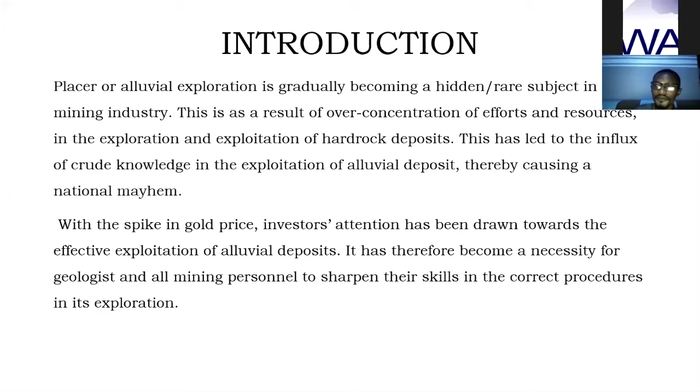We first look at alluvial deposit formation, how alluvial deposits are formed. In school, we all learned how deposits are formed. We learned of hydrothermal deposits, skarn deposits. But unlike other deposits, alluvial deposits are not primary, like they came from lava or something of that sort. Alluvial deposits are secondary. It means a first step must be done before a second one happens. So alluvial deposits are always a derived deposit.

So they are gotten from either an igneous or metamorphic deposit, which has been weathered to form the alluvial deposits. And it is formed by the weathering of enriched veins, which eventually accumulates the mineral of interest. The vein itself might not be potentially exploitable.

When you come to the eastern corridor of Ghana, there is only one hard rock mining company here, which is Newmont Akyem. But there are numerous alluvial deposits here. And you ask yourself, why is there only one hard rock mining company and many alluvial deposits here? It is because the vein that the alluvial deposit was formed from might not be exploitable. That is, the width or thickness might be so small that hard rock mining cannot be done on it.

And so with continuous washing, eroding and weathering of this small vein, it accumulates by the action of water and other bodies, and then it further becomes mineable for alluvial mining companies. Through countless ages, the surrounding country rock and vein itself weathered, broke down and eroded away by rain, frost, and chemical reactions. The gold, being chemically resistant and heavy, was left behind in the process.

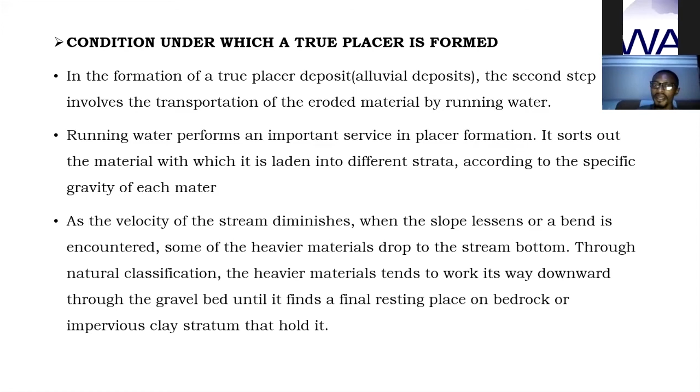Consequently, the bottom gravels are enriched with metallic particles, the coarse and heavier gold particles seeking the bedrock, while the lighter ones are found higher up. So when you encounter a gravel which is enriched, you can see that the nuggets are found on the base, that is closer to the bedrock, with the powdered ones on top.

However, the gold usually ends on the bedrock and doesn't go deeper, because the bedrock is the parent rock, the foundation on which the gravel was laid thousands of years ago. And so the gold particles will not go within or below the bedrock. That is for alluvial deposits. But sometimes the gold itself will be found a little bit within the bedrock, which becomes clay. And so it is sometimes better to add the bedrock in your exploration activities.

One thing you have to know is that it doesn't always follow that rich placer deposits are found in close proximity to a vein. When you find a rich placer deposit, it doesn't mean that there is a rich vein near. That is not always the case. Indeed, the conditions favorable for the concentration of the gold may be found many kilometers from where the precious metal was first torn out from the vein walls, none of which may be economical to work on by itself.

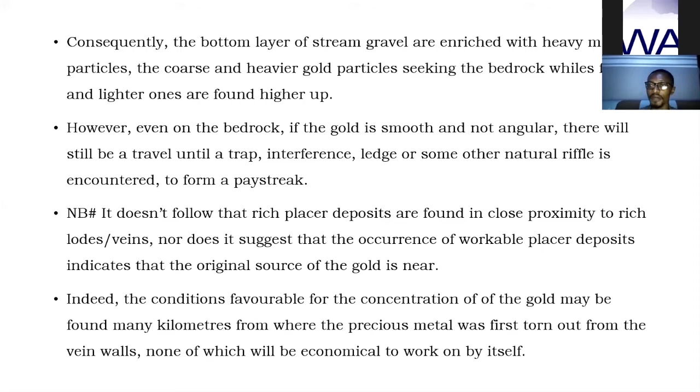As I said, when you come to the Eastern Corridor of Ghana, Newmont Akyem is here, but there are numerous alluvial mining companies and galamsey people around. They search for the smaller veins that the hard rock people cannot mine, and they treat it as galamsey people. And so these smaller veins have been worn down and accumulated together to form alluvial deposits, which are mined by other alluvial mining companies. However, you can look at a gold particle and confirm whether the source of the gold is near or far.

When you process your sample and get the gold out of it, and use a microscope to look at it, sometimes you can see it's very smooth or rounded. It means it has traveled very far. But sometimes it's jagged and angular. It means the source of the gold is not that far. So that is one of the indications that can help you. Maybe you want to trace hard rock deposits; that is one of the indications you can use to trace an area where there's a possibility of hard rock deposits.

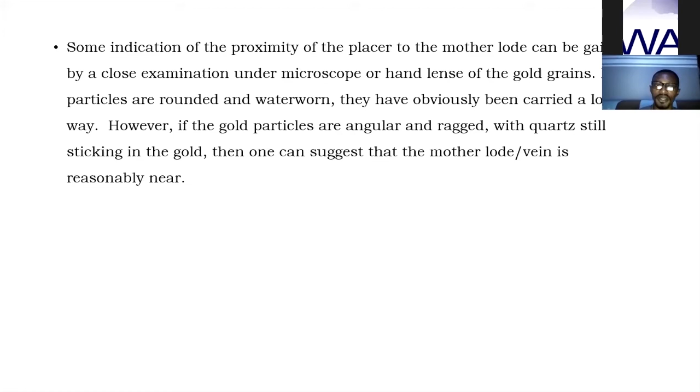However, there are similar deposits to the alluvial deposits. We have the eluvial deposits. These are deposits derived by in situ weathering or slight gravitational movement and accumulation. And we have the colluvium. This is a general name for loose, unconsolidated sediments that have been deposited at the base of a hill slope by either rainwash, sheet wash, slow continuous downslope creep, or a variable combination of these processes.

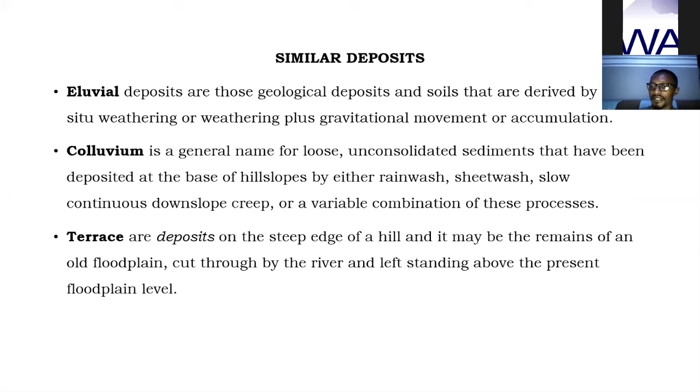When it moves down to the base of the mountain, we call it colluvium. When it comes to the river, which is the main transport medium, it becomes the placer. And when it moves and deposits on the steep sides of a mountain, it forms the terrace deposits. So one will ask, what's the difference between terrace deposits and colluvium deposits, knowing that they all lie at the base of a mountain? When you look at the gravel of a colluvium deposit, because it hasn't traveled far, it's from this same mountain that it got deposited here.

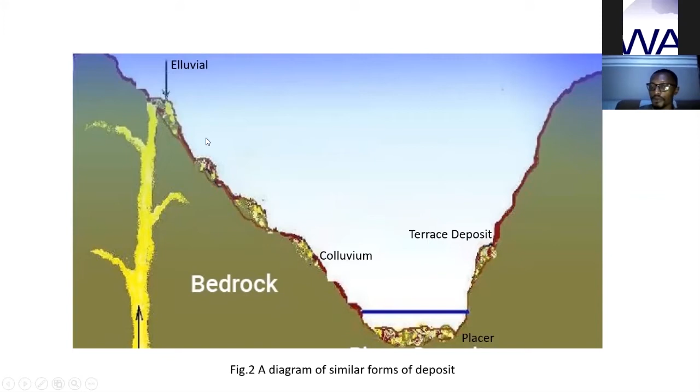The rock constituents are similar to the environment in which they are deposited. But because this material traveled from somewhere and was deposited on the hillside of a mountain encountered in the transport direction of the river, these gravel or rock components will not be similar to the environment in which they are found. That is the difference between terrace deposits, colluvium, alluvial deposits, and placer.

In the alluvial mining environment, alluvial mining has largely been left to the Galamsey people. When you mention alluvial, the word that comes to everyone's mind is Galamsey. In Ghana, Galamsey has caused a national crisis, and efforts aimed at mitigating its effects have proven futile. Our water bodies, virgin forests, sacred groves, and tourist sites have all been adversely affected by the evil hands of unprofessional placer mining.

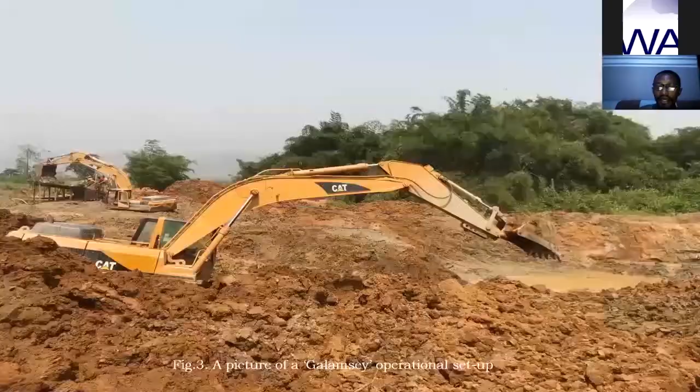This is a Galamsey site. You can see how they are destroying the land. It's difficult to reclaim this. This is the Galamsey site.

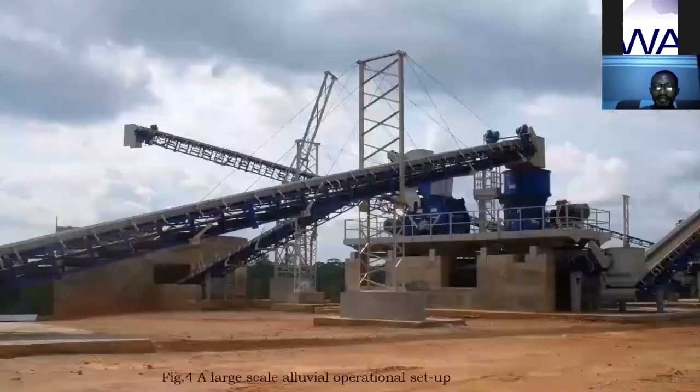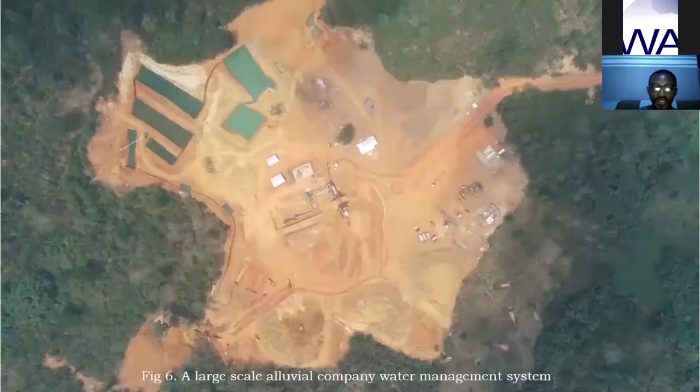I took this drone shot, and when you look at it, they use a serpentine movement to do the recycling and washing. After they create a dam, very big ones, they pump water from nearby water bodies into it. Once they start washing, they will not pump water from any stream again, nor will any water move from the operation site to the river bodies.

This is the plant, and the dirty water will move to this one. It settles down through this channel, gets to this one, settles again into this one, settles again into this one. This one gives water back to this, just like a snake, which is why we call it a serpentine. And then this, and then this. When it gets here, it will be clean enough to wash again with. So they put pumps there, which pump the water to the plant to be used for washing.

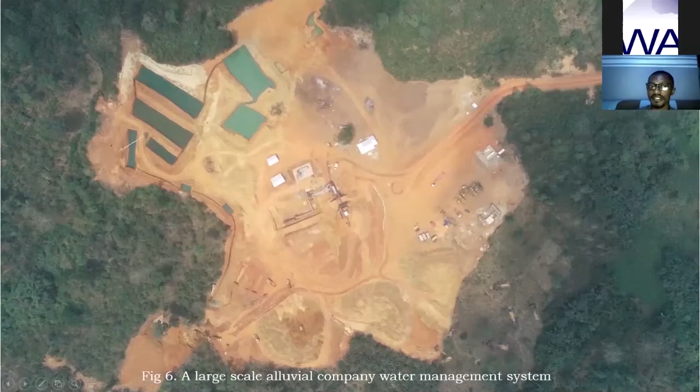We have some superstitions surrounding alluvial deposit prospecting. They believe that gold is a spirit and has an affinity for blood. It will shock you that when you go to the bush with people following you, and maybe you are working and someone gets hurt, some of them become happy because they believe that since blood has come out, the gold or the sample will be of high grade.

This can be seen in Galamsey sites where, before they start mining, they kill a sheep or goat, and sometimes bury a cow, because they believe that gold is a spirit and must be appeased with blood before you can get a high grade. They also believe that wherever a rainbow ends, there is a high possibility of the presence of a paystreak. A paystreak is an ore within an ore which is very, very profitable. Even in our childhood, I think we heard that wherever a rainbow ends, there's a high possibility of the presence of a paystreak.

To me, I've seen this enough, so I tried to prove it. We saw a rainbow and tried to follow where it ended. We went there and did a pitting. We got nothing — indeed, it was a low grade. We got nothing, so this has been proven false, or at least for my side, it has been proven false.

Gold being a spirit, they also believe it can willingly appear and disappear. They think that when you do your prospecting and get a grade, because it's a spirit, if you don't appease it, you will come back there again and the grade will not be as you predicted.

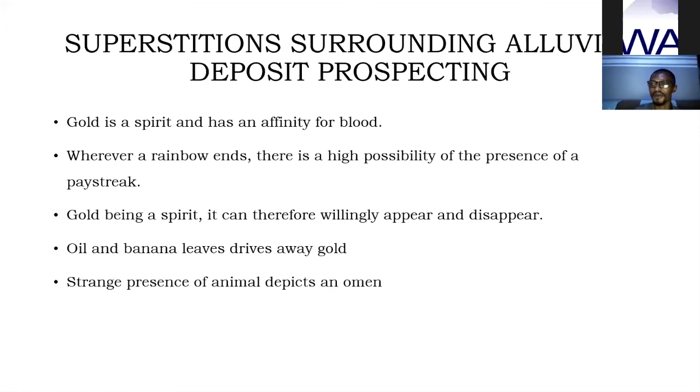When you want to start prospecting, the equipment needed includes a GPS device, measuring tape, spray marker, pump machines, sieve analysis tools, pans, a 2 decimal place scale, a kilogram scale, and perhaps a prospector machine, one of the very essential components of prospecting.

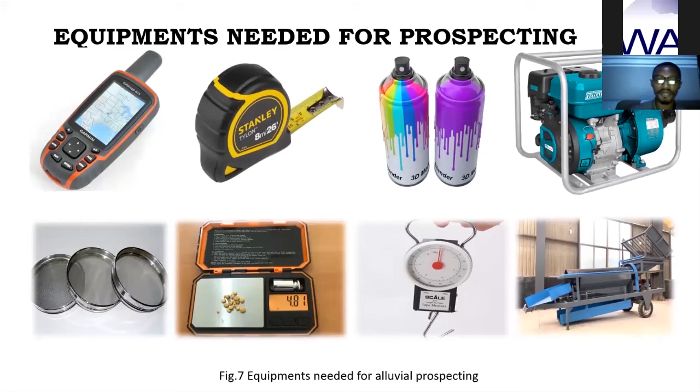I have a budget here that I sent to someone. It includes cutlasses, GPS batteries, flagging tapes, permanent marker pens, a 50-meter measuring tape, pick axes, shovels, digging axes, iron bar, bucket, rope, head pans, rubber bowls, sample bags, 0.1 cubic meter drums, hand gloves, pumping machines, extracting blanket, shunk or topper sieve, basin, panning or wooden bowl which they call Kudowa, gold pans, a field notebook for your own use, A4 sheets, flat file, stapling machine, stapling pins, Wellington boots, helmet, and field bags, which will cost a total of around 4,000 cedis.

Then a prospector machine currently costs around 2,000 Ghana cedis. So with 6,000 cedis, you can start your own business if you're a geologist and unemployed. When you have a contract and submit this budget to them, they have to supply you all these materials or logistics for you to go into the field to do your prospecting.

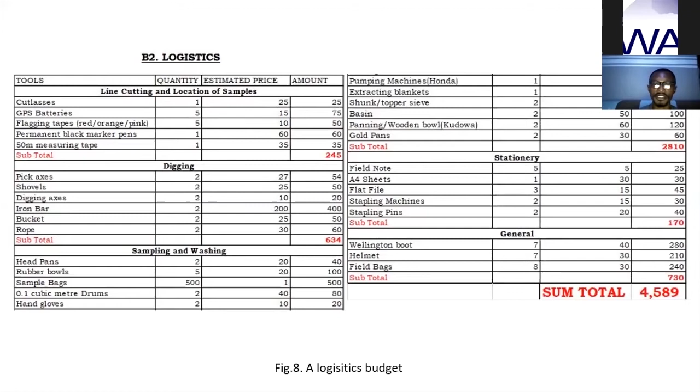Before you go to the field, there are background activities you have to do. First, ensure there is a cordial agreement with opinion leaders and investors before you set out. Negligence of this point has led to the death of many geologists, as well as injury of many personnel and other geologists. So ensure there is an agreement, even a written agreement, between you, the investor sending you into the field, and the opinion leaders.

You have to do background checks. Ensure the area to be prospected is an auriferous zone, you don't want to waste money digging pits when there's actually no gold in the area. So the first thing to do is find a major stream, go to a bank where the river is not too deep, take a sample, and wash it. If you get even a small speck of gold in it, there's a high probability that there's gold in the area.

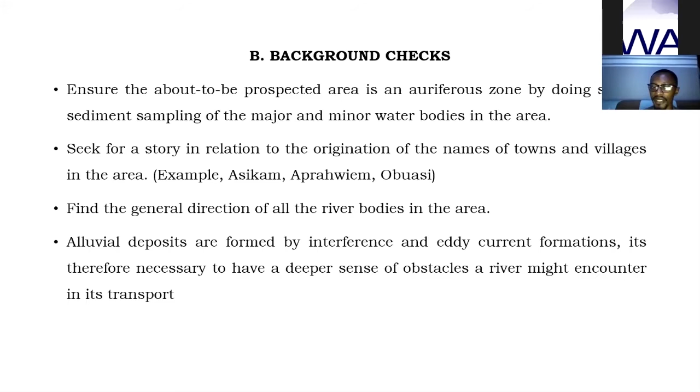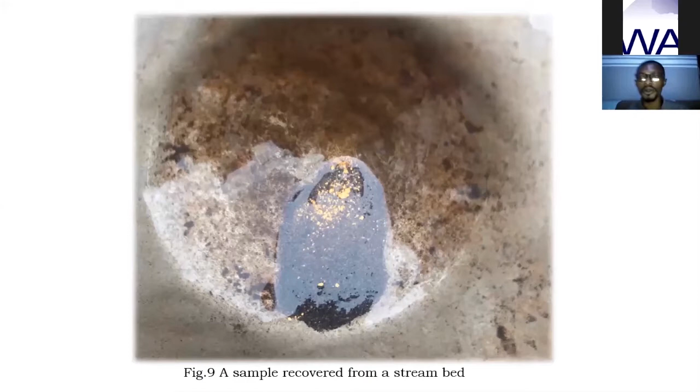Before you go into prospecting, you know budget is scanty. So as a geologist, if they ask you, can you just put in one point, just one point to show us whether the place is good or not? That is finding paystreak zones. You should be able to do that because it is your expertise. So when they tell you they need only one point for you to put there, you should be able to put a point to show whether the place is good to be exploited or explored.

The first thing you have to do is find ancient working pits. Our grandfathers were not stupid enough to work on places which are not rich. So when you see places like this where they have dug into the ground to search for a mineral of interest, it means the place is rich. You should also put a point there to see what they were looking after.

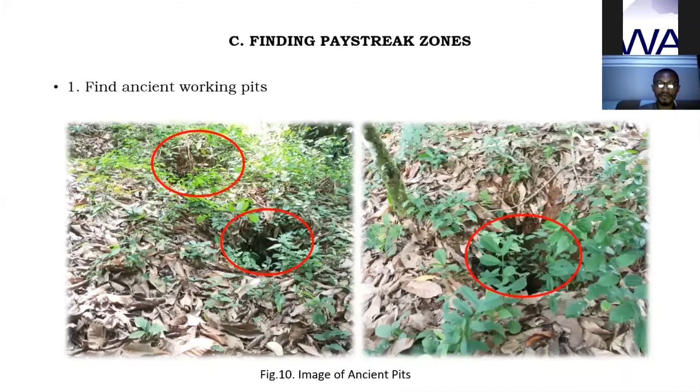The first thing you have to do in the field is create a model, not just go and be putting points there. You have to do a three-dimensional model to know whether the area is good or not by looking at the paleo environment. When I say look at the paleo environment, it tells you that any valley you are seeing now, in the olden days or in the paleo environment, in time past, was bigger, and any mountain you are seeing now was higher. Any valley you are seeing now was thicker or wider, and any mountain you are seeing now was higher.

If given the second chance, I will try to teach how to create a three-dimensional model using Surfer, if I'm given the next chance.

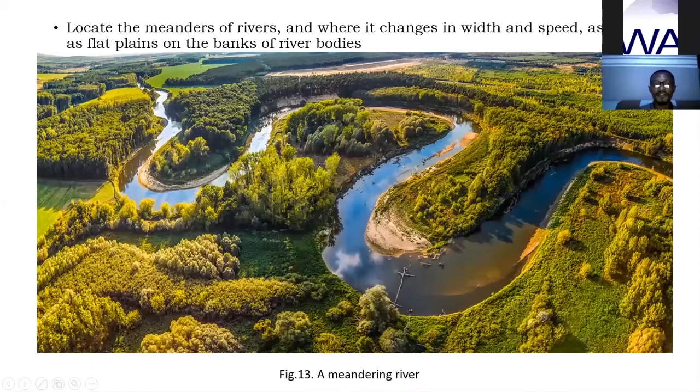And when you see a flat plain just beside a river body, that place you should prospect, because it served as a flood plain. So any load of gravel the river was coming with, it deposits it on the flat plain. Also, when you see a river which has been interfered with by a mountain base, you should also search the mountain base, because in time past the mountain was obstructing the river. And so the deposits will be formed at the base of that mountain where it was obstructing.

Also, search for marshy areas. Areas that are marshy, when it has not flooded, you can search that place, because in time past it served as a bowl where it collected all the sediment being carried by water. So you can search for marshy areas as well.

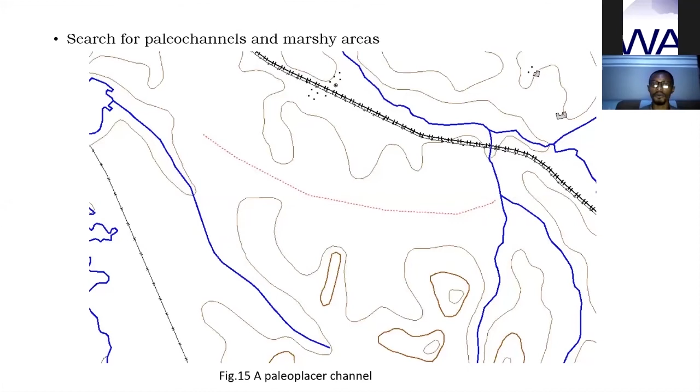And now, knowing how to put paystreak points or where there are high-grade zones, sometimes that alone cannot help you to do a geostatistical analysis. So you have to plan your points on the area that someone has contracted you to search. And we have different means of planning points. We have the baseline and cross-line method, which is usually used by some companies. We have the square, rectangular or kite pattern. We have the grid system, the staggered pattern, the radial pattern, and the random pattern.

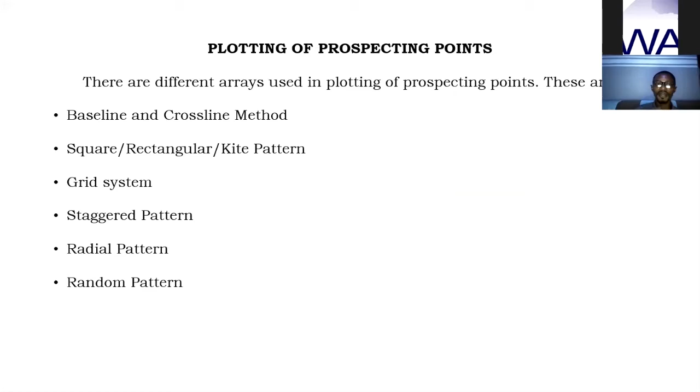The baseline cross-line is a pattern that follows the general direction of the major river of the area. Baseline is the line that follows the direction of the river and seeks to know the grade difference of ore along the river body, whereas cross-line is perpendicular to the baseline and seeks to know the dispersion of grade from the river body. One advantage is it's an effective method to find the trend and extent of an ore body. One disadvantage is an ore body unrelated to the major river may be interpreted as a branch ore body because of the connection between the baseline and the cross-line.

An ore body which is not related to the current river channel may be interpreted as if it is part of the river channel that we see now. And plotting of points becomes confusing in places where there is no distinct general direction of rivers or streams. When the rivers are not flowing in one direction, it becomes difficult to put in a baseline. And so this is the baseline cross-line method. You can see the baseline, which is the green line, following this river.

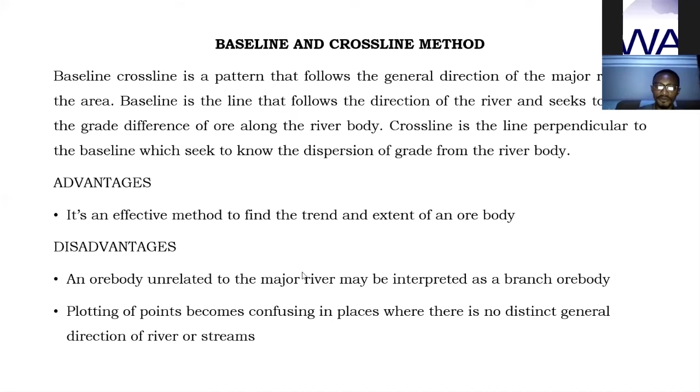So the general direction of the river is northeast, southwest, like this. Have the cross line as the orange; wherever the baseline and the cross line sit, you put a point there.

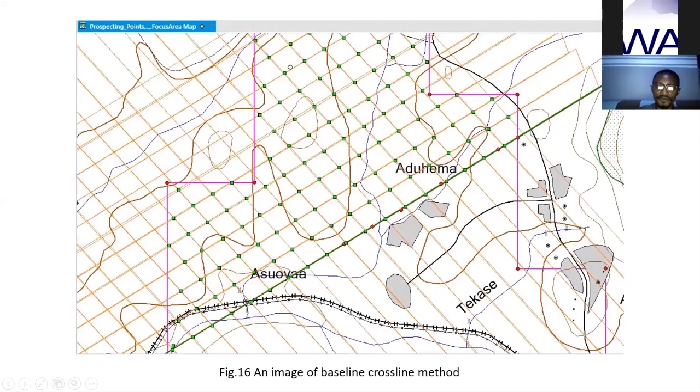We have the square, rectangular, and the kite pattern. The square pattern is used in areas where there is a symmetric dispersion of grade. That is, when you pick a point or you move in that direction, the dispersion seems to be homogeneous. Whereas the rectangular pattern is used in areas where the grade homogeneity is continuous in one direction but converse in the other.

And the kite pattern is used to confirm a pattern, either square or rectangular; you can use the kite pattern to confirm it, together with the square and rectangular pattern. The advantages are its resemblance to the baseline cross-line method. It can predict grade distribution in proximity to the river, as well as the grade distribution of gravel that are not in proximity to the river body. And if accurately spaced, it can predict eluvial, colluvium, and alluvial deposits.

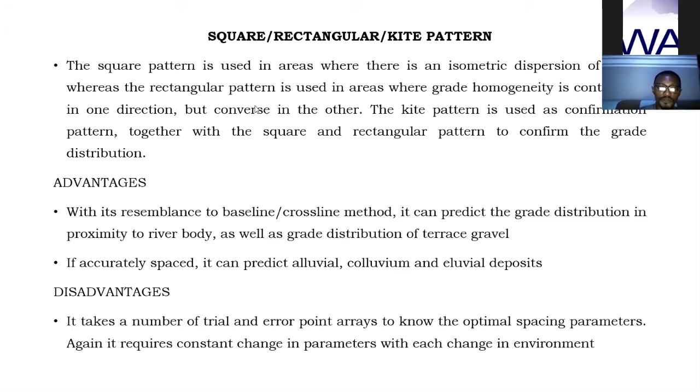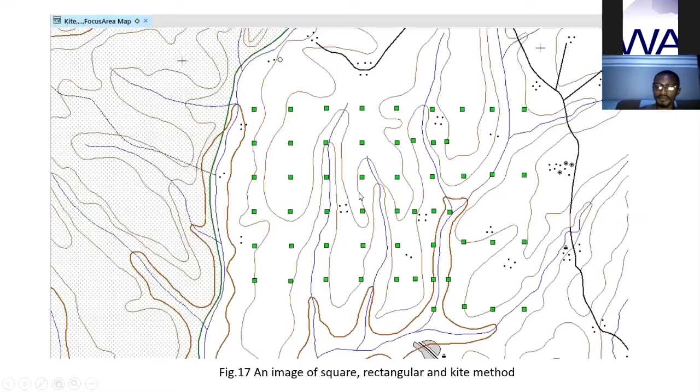And then we have the grid pattern. The grid pattern utilizes the latitude and longitude of an area as a means of plotting points based on predefined spacing criteria. Wherever the longitude and latitude is, one puts a point there. So let me say you are using ArcGIS Pro or MapInfo Pro. You locate your area and you grid longitude and latitude on it based on a spacing of, let's say, 100 meters by 100 meters. So wherever the 100 meter latitude meets the 100 meter longitude, you put a point there.

This system is budget friendly because when you have an area and you want to prospect, you just have to grid the whole area. And maybe the investor tells you, I can only put in 16 points. You look at the whole area, you grid it, and you get your 16 points to tally with the investor's budget. It's effective in places where the ore trend is vast and continuous. When the ore trend is vast and continuous, this is one of the best systems to use, the grid pattern.

But when the ore trend is very small, when your grid is not optimal, you miss the ore. The disadvantages are the essential grade values will be missed if the spacing is not optimal with grade values. This pattern takes no thought of...

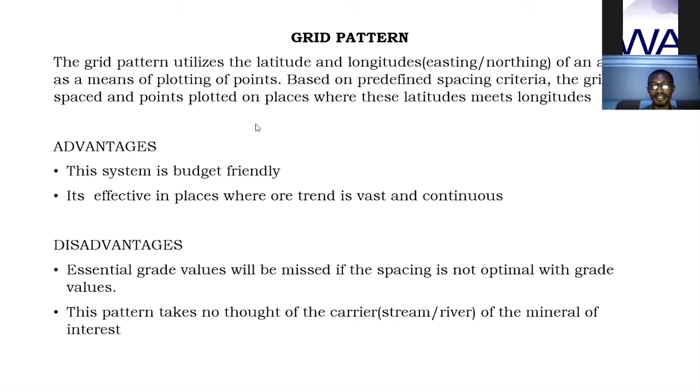Actually, this is the pattern I like the most. This is the pattern I use mostly. This pattern seeks to utilize the merits of both baseline and crossline, as well as the grid pattern method. It seeks to ensure a number of points, each point serving as an infill point or a confirmation point. And deposits with affinity to the stream, as well as the ones unrelated to the streams, can be evaluated as well using the staggered pattern.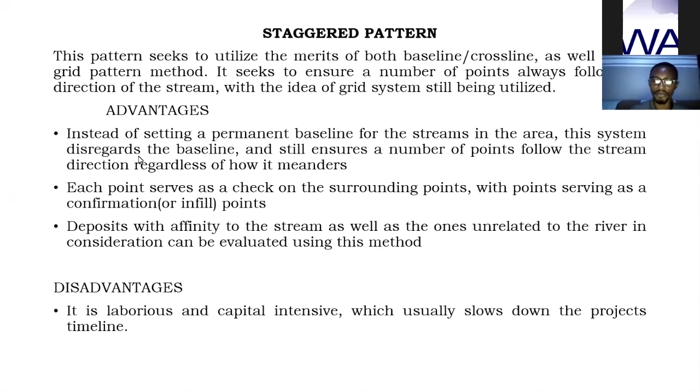And one disadvantage is it is laborious and capital intensive. Where we usually use like 12 or 16 points, the staggered pattern uses more. And so investors are usually not interested in this pattern, but I think it's one of the effective ones in planning of points. So this is it. This also uses the grid lines as well.

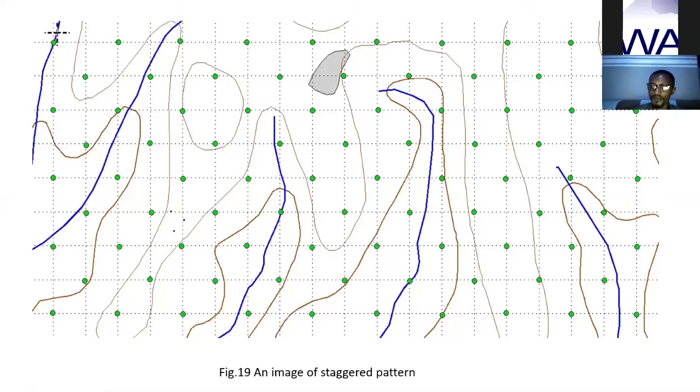When you come to this river, you can see these lines 1, 2, and 3 are following the baseline crossline method for this river. With this small bend here, we can see these two lines 1 and 2 are following the baseline crossline method for this river. When we look at this 1, 2, we can see it's following the baseline crossline method for this, and the same for here as well. And then we have the radial pattern.

This pattern is usually utilized in arid areas or places where there is no clearly defined stream. Again, it can be used to find the dispersion of a deposit in places where a high grade has been found already. Maybe you found a high grade, but you don't know where it is trending. You can use the radial pattern to find it.

It uses a sequential spacing of circles from the origin of the mother circle with points plotted around the circumference of the daughter circle. It can be used to find the dispersion and trend of alluvial, colluvial, terrace, and fluvial deposits. The best method in finding the dispersion and trend of an already found anomaly.

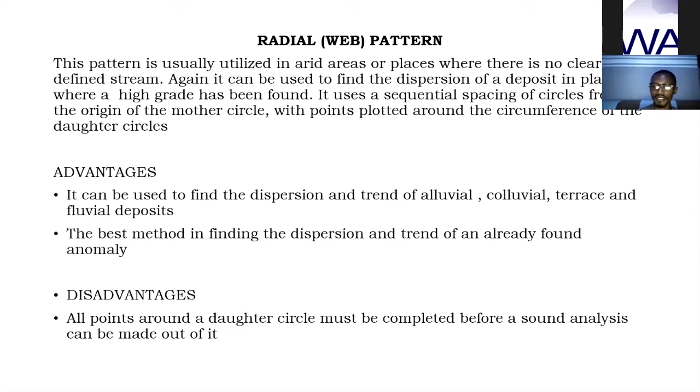Maybe someone has told you, oh, this place when we went to prospect, it was good, and you want to confirm whether what they are saying is true. You can use the radial method to check the trend and extent of it. And one disadvantage is all points around the daughter circle must be completed before a sound analysis can be made out of it. This is a radial pattern.

This anomaly was found, and so we did a radial pattern on this circle around it, did 4 points north, south, east, and west. The next point shouldn't follow that same line, it should follow between these two lines. So northeast, southwest, just like that. So the next point falls here, and then the next point again with points plotted on the circumference, and then the next one again with points plotted on the circumference.

So with this, wherever the grade direction is, using the system, you will find it. And however it expands, you will know how the grade distribution of the area is.

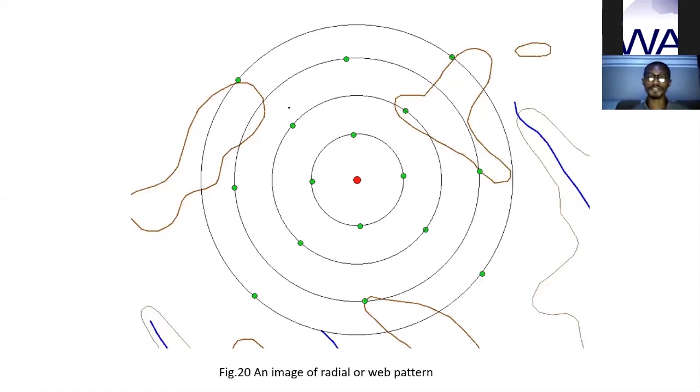And then we have the random system. This system follows no rules. The geologist decides where a point must be placed based on his expertise or the terrain analysis that he has done. And if you know how to use ArcGIS Pro, MapInfo Pro, or QGIS, you can just create a random point in an area and then you start prospecting.

Advantages are it is cost and time effective, but the disadvantages far outweigh the advantages in that a rich area can be neglected as bad and vice versa. You can put a point and you say, oh, the point I placed here, it is bad. And so the whole area is bad, which might not be so. And you can say an area might be good, which might not be so.

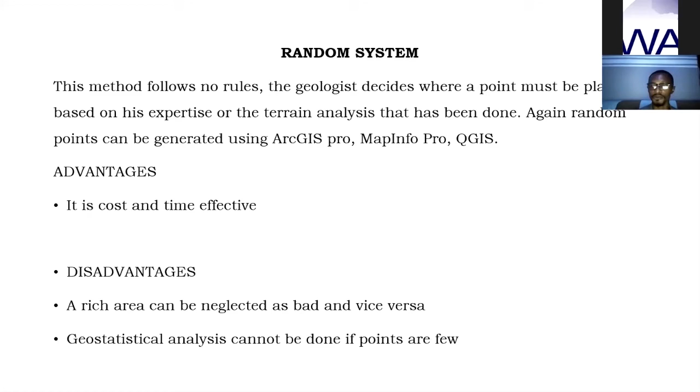And with this, geostatistical analysis cannot be done if there are few. With like 5 points, 3 points, you can't do geostatistical analysis on it.

So now we're hoping that we have planned our points. We are done with every negotiation with farmers, with opinion leaders in the area. So we are going to the field. The field procedure: the first thing is, now you planned your points, you have to locate your planned points using the GPS device.

This is one of the GPS devices I was using, and this is Garmin eTrex 20x. So you locate your points using any GPS device you have. I think this device is 1,300. Yeah, this device is 1,300 Ghana cedis.

And then when you go to the field, you have to mark out the pit that you want them to dig. And so the dimension is 1 meter by 1 meter on these ends. And then you make them initiate the digging. Ensure that the 1 meter by 1 meter dimension is obeyed till they reach the bedrock.

Sometimes when you are not there and they are digging, by the time you come, it will be like a cone. That is, it will be broad on top, but it will be small downwards. And so you should ensure that the same 1 meter by 1 meter is followed till it reaches the bedrock. If that one is not followed, your calculation of volume might be wrong.

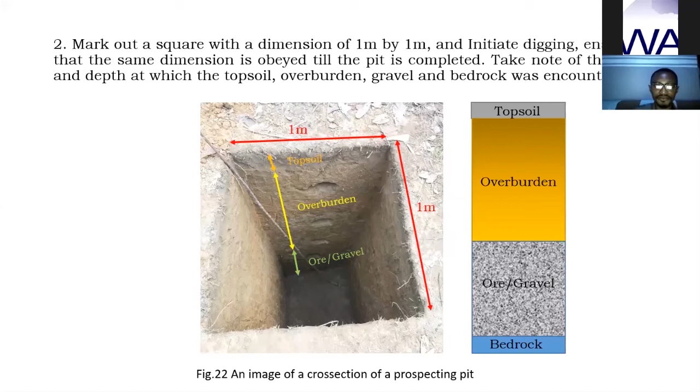Sorry for that. However, when the pit they are digging caves in, you have to protect it through cribbing. You put pillars around it so that if it collapses, no one digging will die. If you do this, it means you cannot follow the 1 meter by 1 meter dimension. You have to increase it to a 1.2 meter by 1.2 meter dimension so that it can accommodate this wood structure for your digging to continue.

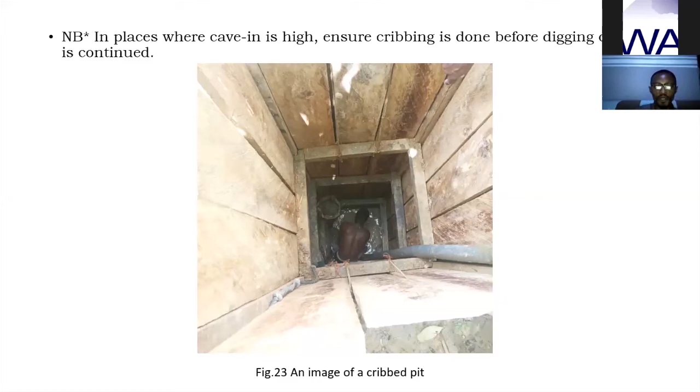So this is an image of a cribbed pit. The place was caving in, so we had to do cribbing. Now they are bringing the gravel out. This is the gravel, this is the ore. Whenever you get to the gravel level, every 0.5 meter you reach, you must put it aside, every 0.5 meter till you get to the bedrock. You can see that is the hole they are digging. That is the first 0.5 meter, the second 0.5 meter, the third 0.5 meter.

It's expected that when you finish digging your 0.5 meter, you get exactly that, but that is not always the case. So we use the 0.1 cubic meter box to check the actual volume they are bringing out. The number of boxes that they wash will tell you whether it is 0.5, 0.6 or 0.7 cubic meters. Or you can pause this 0.1 cubic meter measurement, leave the samples there, and continue while doing your processing of the samples.

When bedrock is encountered, sample at a depth of 0.2 meters. When they get to the bedrock, let them dig to 0.2 meters to check if the bedrock has a greater number of specks incorporated into it. If those specks are in the bedrock, when you send the gravel to the plant, they should add a portion of the bedrock to be washed at the plant. However, some alluvial companies want to move into hard rock mining, so when you get to the bedrock, you sample some and send it to SGS or ALS for geochemical analysis.

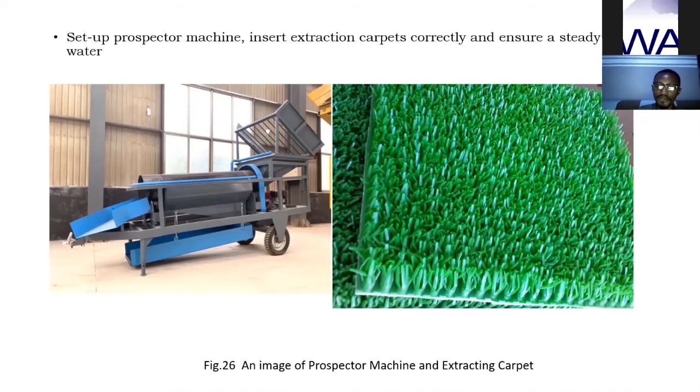You must always ensure it is perpendicular to it, because if you make it parallel, you will get no gold from it. It should be perpendicular, because I said gold will only accumulate when there is interference in it. So if you make it perpendicular to the flow of the water being used in the washing, because the ridges are blocking it, the gold particles will be accumulated at the ends of the ridges. So you must ensure that, if you want to get accurate results.

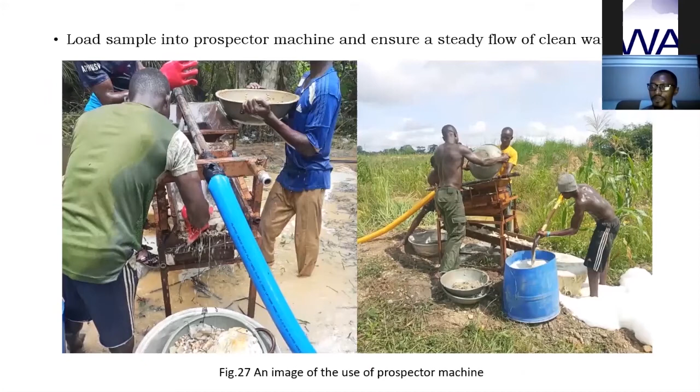And you can see some of my guys washing the samples. They soak the samples and they are washing it using the prospector machine. And for accurate results, make sure the sample is washed clean. In a sample that is washed, we shouldn't be observing clay particles. The sample should be washed so clean that it can even be used for building or something like that. With that, you will get the accurate results that you want.

Continue processing until all impurities in the final concentrate are done away with. After final processing, using the gold pan, a clean gold particle must be ready for weighing and eventual analysis. People use mercury to coagulate the gold particles. To me, it is environmentally and metallurgically not correct, because mercury is very destructive, and so it shouldn't be used. And metallurgically, the plant people will not be using mercury, and the prospecting should always tally with the plant, so why should you be using mercury when the plant people are not? So you shouldn't be using mercury at all, because it's not sound.

And in weighing of gold, separate the specks or the nugget found during digging or washing, because if you add it to the bulk of the gold that you recovered from the samples, it will cause an outlier effect in your geostatistical analysis. However, you should account for it in your calculation.

And you must have an eye to differentiate between fool's gold, that is pyrite or chalcopyrite, rusted gold, and clean gold, because rusted gold is still gold, it was just rusted. And you should also know the difference between pyrite and chalcopyrite. One hint is to use the streak method. When someone shows you something that he says is a gold particle, if you have a needle or something harder, just scrape the surface. If the powder that comes out is yellow, it's good. But if it becomes dark, it's not good. It's either pyrite or chalcopyrite.

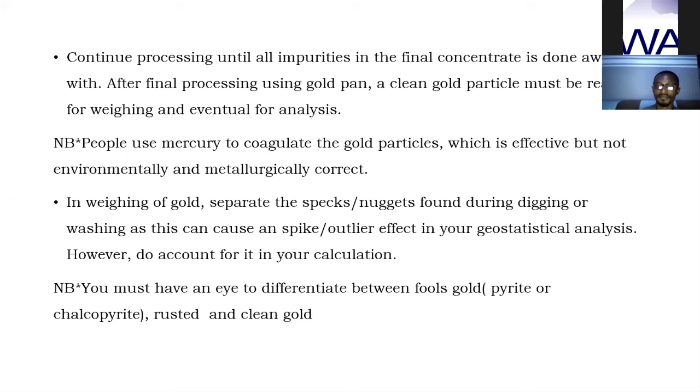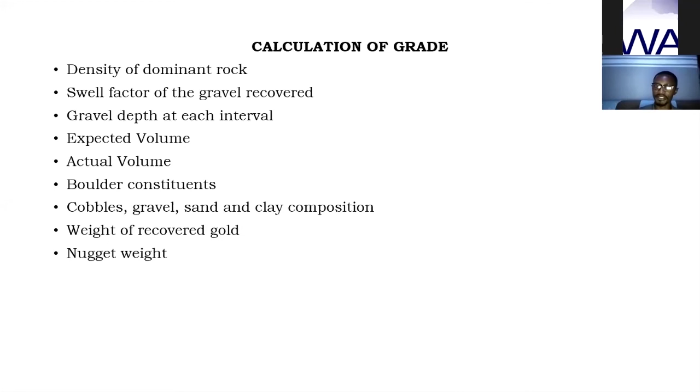Before you calculate the grade, you must know the density of the dominant rock in the area. You must know the swell factor of the gravel, and then the gravel depth at each interval. You must also know the expected volume, the actual volume, the boulder constituents, the cobbles, gravel, sand and clay compositions, the weight of recovered gold, and then the nugget weight. And these are the formulas that are used.

The bankable volume is equal to actual volume minus boulder volume, and the loose volume is equal to bankable volume times swell factor. The nugget effect is equal to the nugget recovered over total gold recovered times 100%. And the crude grade is the total gold recovered over the loose volume.

And the sectional grade is the grade of the first layer times the thickness of the same layer times the cross-sectional area of the pit, plus the grade of the middle layer times the thickness of the middle layer times the area of the pit that was dug, plus that of the bottom layer. And then you divide by the thickness times the area, plus the thickness times the area.

We know that the area is 1 meter by 1 meter, so it will be 1 meter squared. It will be G1 times L1, because A1 is always 1, since it's 1 meter by 1 meter. So G1 times L1, G2 times L2, Gn times Ln over L1 plus L2 plus Ln.

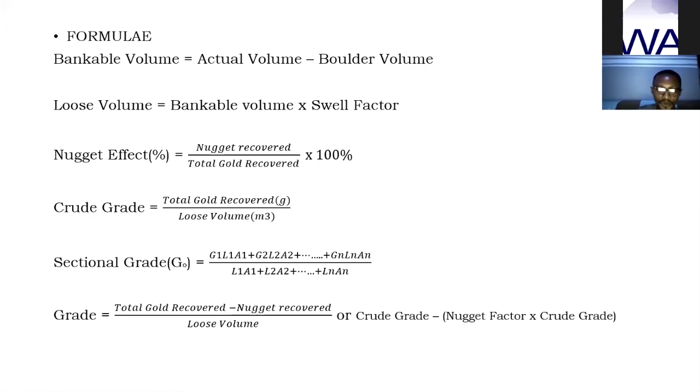To calculate the grade, it's total gold recovered minus nugget recovered over loose volume, or crude grade minus nugget factor times crude grade. This will give you the grade of the prospected area.

We have this data for pit AB001, where the density of the gravel is 2,320 kilogram per meter cube. The swell factor is 1.2, topsoil is 0.5, overburden is 3.0, gravel or ore width is 1.5. The sample we picked for sieve analysis is 5 kilogram for each layer.

Then we got the cobbles. When we did the sieve analysis, we got these cobbles, the constituents that we are seeing here. And then from depth to depth of each ore layer: 3.5 to 4, 4.0 to 4.5, 4.5 to 5.0.

Number of 0.1 boxes processed at each layer. The first layer, we got 5 boxes, as expected. The second layer, we got 7 boxes. The third layer, we got 8 boxes.

Boulders encountered in the first layer, we got 3 kilogram. The second one, we got 3.5 kilogram. The bottom layer, we got 5 kilogram. The gold recovered at each layer: the top one 0.3 gram, the middle 0.6, the bottom 0.75, as well as the nugget constituents.

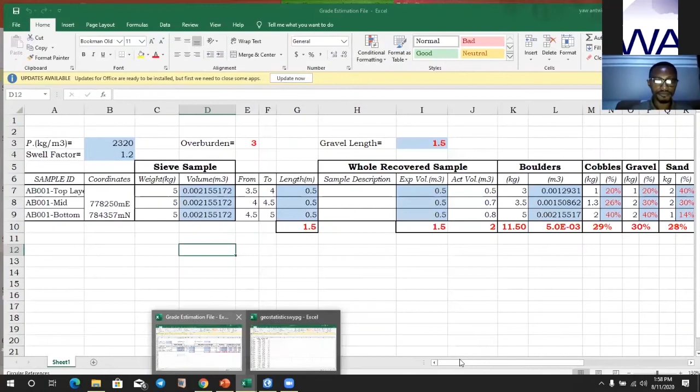I would want us to do a little bit of calculation using Excel. So I would delete all this.

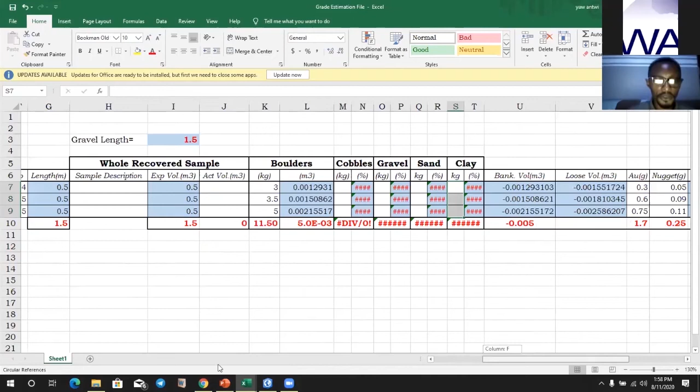So we look at our data and then we insert it. We have density, that one has already been inserted. We have swell factor, and sample weight that we picked to do the sieve, and everyone is 5 kilogram, so I just put it there. Sieve is 5 kilogram, 5, 5, 5.

Because we have the density, we will divide the kilogram by the density, and then we will get the volume. Because the boulder is not a regular shape, if you try to find the volume directly, you will not get it. So if you get the weight and know the density of the rock type, you just divide it and get the volume of that boulder constituent.

And then we have our layers, from layer to layer, here. The length of each layer was 0.5. You then describe your samples using the color, the roundness, how clear it is. You just do that to do your sample description.

So the expected volume, if we are having an area of 1 meter by 1 meter, we should get an expected volume of 0.5 meter cube. That is the expected volume.

So the actual volume, because we washed, let's look at our data again. For the first one, we washed number of boxes, we got 5 boxes. 1 box is 0.1, so in 5 boxes this will be 0.5 meter cube. That is the actual one.

The second one, we washed 7 boxes, so it will be 0.7. The third one, we washed 8 boxes, so 0.8. So the total volume should have been 1.5, but now you got the total volume recovered to be 2 meter cube. That is the actual volume that you got.

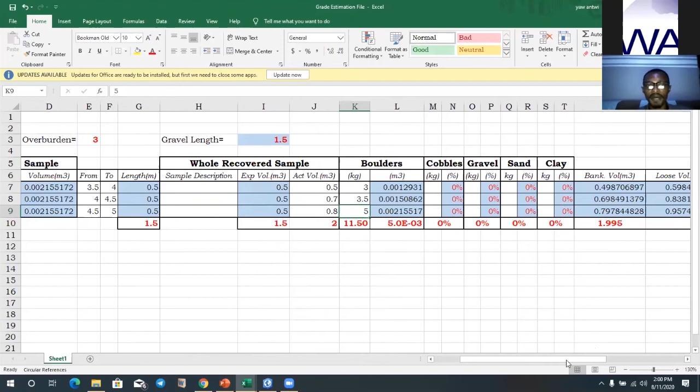Out of the boulder constituents, we got 3.5. We still divide it by the density, and you will get the volume. With that, we have to calculate the bank volume. The bank volume is the actual volume minus the boulder volume, so we subtract this volume from the actual volume to get the bank volume.

So we can see when we look at the formula, the actual volume minus the boulder volume. With that, it will give you the bank volume.

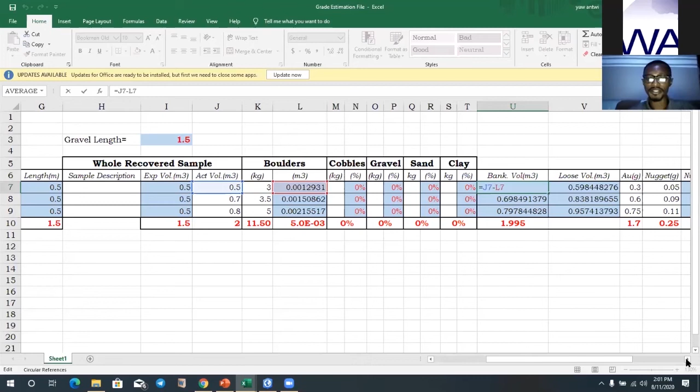And then we come to the loose volume. That one too is the bank volume times the swell factor, which is 1.2.

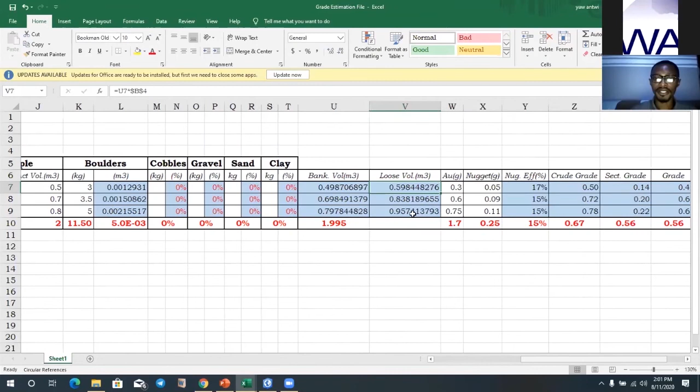And then the gold recovered: 0.3, 0.75. The nugget constituents is here. With the formulas that I showed early on, this will give you the nugget effect of 17%, 15%, and 15%. So the crude grade will be 0.5.

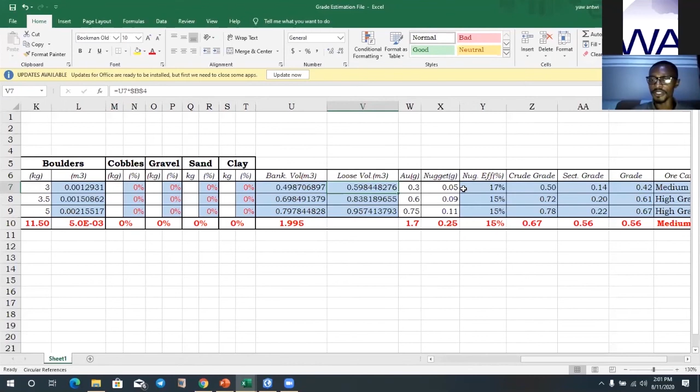This one hasn't been corrected, we just use the normal methods to get 0.5, 0.7 to 0.78 - this is the crude grade. We don't report this one because some minor errors might be in it, since we've not corrected the boulder corrections. We've not done any corrections on it, so reporting this will give you a wrong answer.

And so we have the sectional grade. The sectional grade tries to pick one layer and compare it to the whole thickness of the gravel that was encountered. And so summing it up together, it should give you the average grade of the whole gravel you brought out.

And then we have grade categorization. You should ask the investor which cutoff point he wants. If he says 0.2, then you know the categorization you should do: 0.2 to 0.4 is low grade, 0.4 to 0.6 is medium, 0.6 to 1 is high grade. So with that, you do your grade categorization.

And so with these points that we are having with this data, our grade is 0.56. This is confirmed by the sectional grade method, which is also 0.56. So with this, we are good to go.

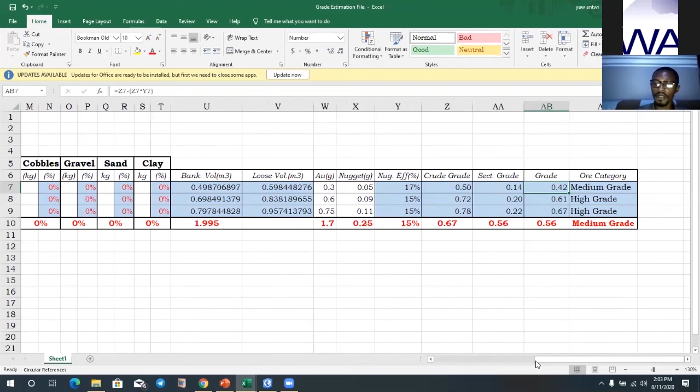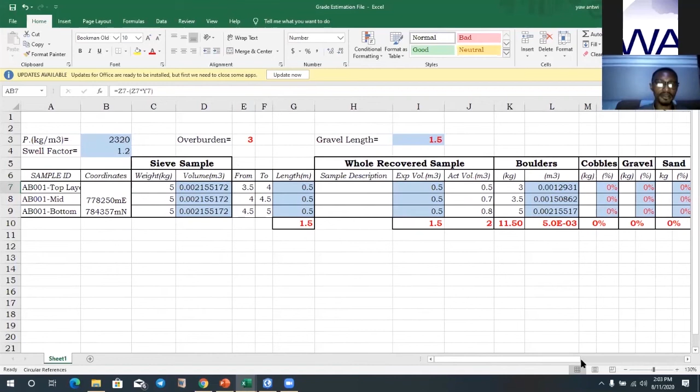And with the sieve analysis, you just input the sample that you pick. The sample you picked were 5 kilograms, which is here. And then the percentage, after using your sieve, of each constituent of gravel, cobble, sand, or clay, you put it here and it will give you the percentage.

This is necessary because if you work in a place for so long, it's not always that you should be doing prospecting. Always, when you see a gravel, by looking at the cobble constituent or the gravel constituent or the clay constituent, you should just tell whether this is a bad grade or a good grade gravel. By doing the sieve analysis for an entire area for quite some number of times, you should know that when I see a gravel constituent of 30%, it means that place is a high grade.

And so there's no need always trying to wash. That will serve as a checkpoint to see whether this place will be good or not. So it's necessary to calculate these ones as well.

So we got the sample we picked, which were 5 kilograms, and the cobble, let's say we put one here. If we put one here, it will calculate the percentage of it, 20%. So 2, maybe 1, maybe 0.7. As you put it there, it will be calculating. And then when you are done with the whole layer, it will give you the total percentage of cobbles, gravel, or sand in the whole area. So that will help you in your analysis.

With this done, we continue with our presentation.

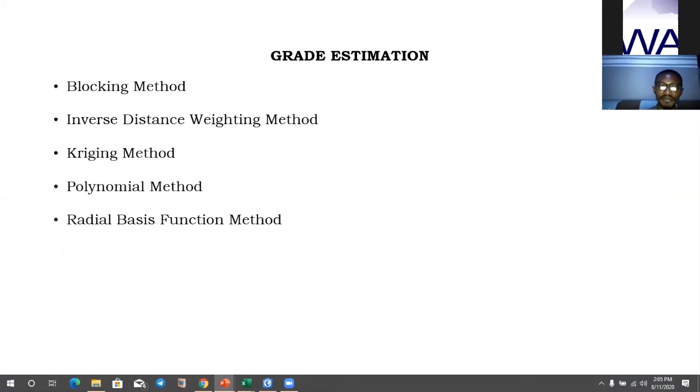And then we have the grade estimation. We have the blocking method, the inverse distance weighting method, the Kriging method, the polynomial method, and radial basis function method. So we will take it one after the other.

This method utilizes the following assumption: wherever you pick a sample or do your pitting, the grade value will extend only to half distance to the nearest point. Let's say if you have 2 prospecting points maybe 120 meters apart, one grade will extend only to half of it, so let's say 60 meters, and it will not extend to the other one's region.

So that is it, and then you block around it to know the area that will be covered by that particular point. So for an area around the sample, all points in the area will have the same grade as that point. With these assumptions, polygons are manually created around each point to create an array of colored blocks to show the grade distribution. This method is somehow archaic because we have tools for geostatistical analysis.

However, for a quick analysis, I think you can use that one as well.

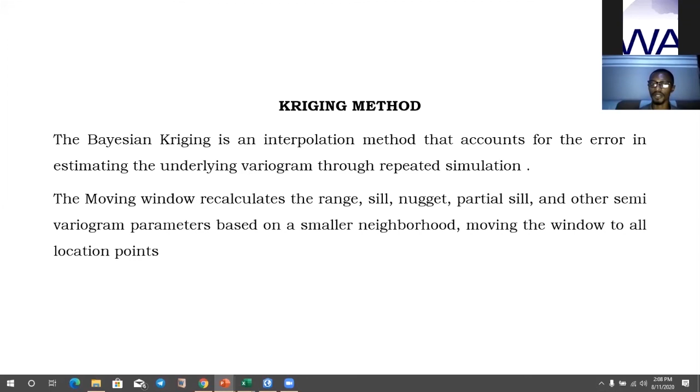Actually, I use Bayesian Kriging, which is an interpolation method that accounts for the error in estimating the underlying variogram through repeated simulation. So for a sample location, it will sample it, you tell it what it should do. You can sample it like 100 times, create a variogram model maybe 100 times, and then it will bring out a final one. Then we have the moving window, which recalculates the range, sill of every portion of the sample points, and brings out a final one. That is the moving window Kriging method.

So we will go through some Kriging parameters. According to Tobler's first law of geography, at a certain distance, range autocorrelation becomes independent, where the variation levels off, which is called the sill. At this point, there is no longer any autocorrelation or relationship between the points of your data.

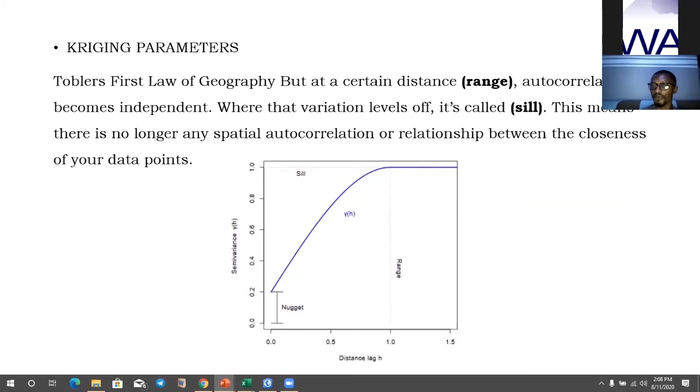And then we have the sill. The sill here is the y value at which the model flattens out. The range is the distance at which the model flattens out. And then the value at which the semi-variogram almost intercepts the y-axis, that is the nugget. So we have various mathematical models and functions.

You have the linear model, which is usually used. You have the spherical model, which uses the modified cubic equation, where spatial dependence flattens on the sill and the range. Then we have the exponential model, where the relationship between two sample points decays gradually as spatial dependency dissipates at infinity.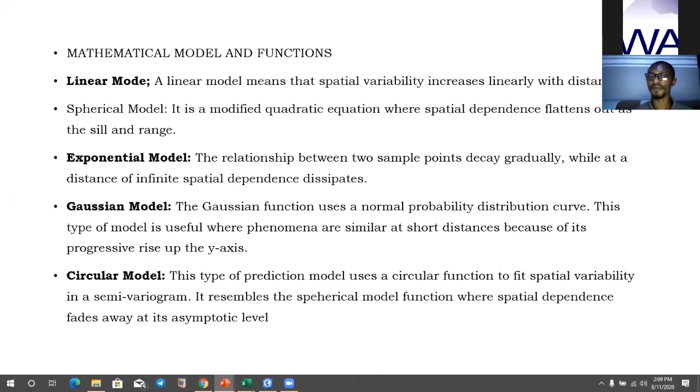Then we have the Gaussian method, which uses the normal probability curve. This method is useful for phenomena which are similar at short distance because of its progressive rise up the y-axis. And then we have the circular model as well. So these are the various mathematical models and functions.

So this was created using the Bayesian method, and then we use polynomial interpolation. We have global interpolation, which fits a smooth surface defined by a mathematical function to the input sample points. And we have the local interpolation method, which fits a specified order of polynomial within overlapping neighborhoods and outputs a surface. That is it.

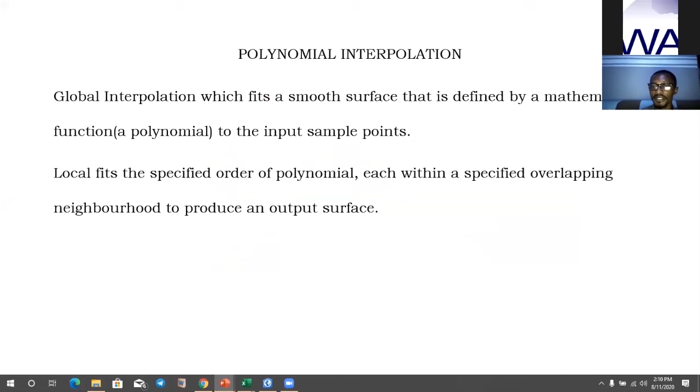I will try to do that in ArcGIS. So this one was done using the polynomial method. Then we have the radial basis function. This uses five basic functions to interpolate the surface that passes through the input points directly.

So before we go to resource and reserve, I want us to go to ArcGIS Pro if we can create something out of there. So I have my data. I will look at it. I will open it. We have sample ID, the easting and the northing, and the grade associated with it.

So we are coming to use that. I display my X and Y. And then my sheet comes here. I choose that one. For the X field, I choose easting. Y field, I choose northing. In place of the Z, I choose the grade. And then I choose my coordinates.

Then I run it, waiting for it to show. So my X and Y are here.

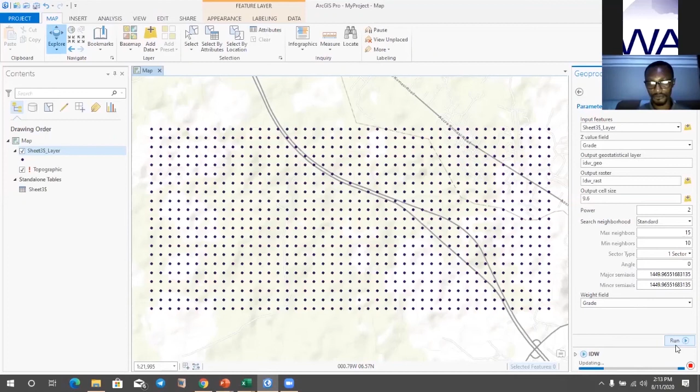It's a complex process, so let's have patience.

I don't know why. I think my geostatistical analysis has been shown. When I zoom in, it seems to disappear. So that is my geostatistical analysis. I wanted to zoom in for us to see the points in this grid, but when I zoom in, it disappears. So that's the geostatistical analysis using the inverse distance weighting method.

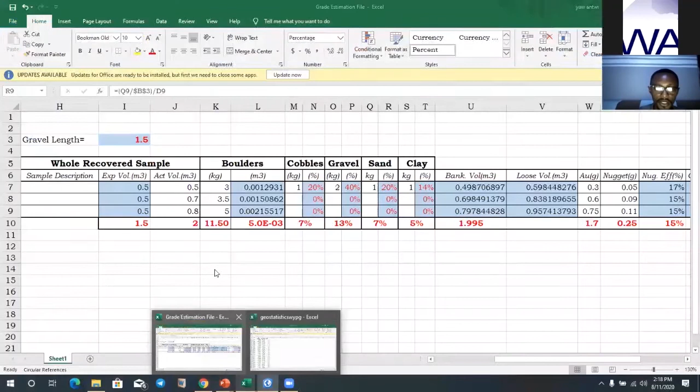It's taking quite a longer time than expected. So maybe we can continue with our presentation. And so now we will consider the resource and then the reserve.

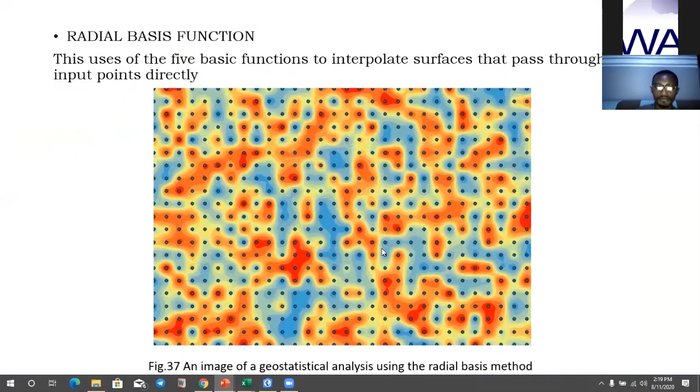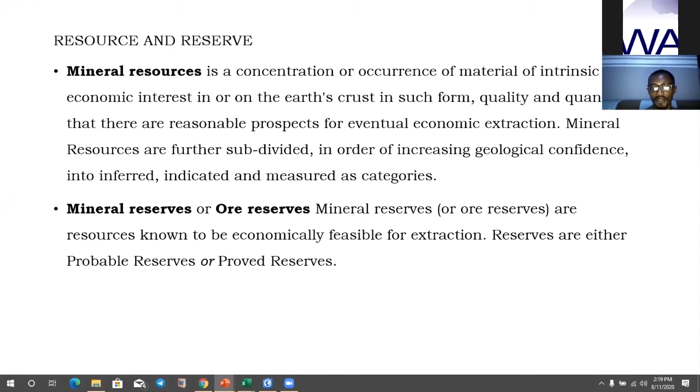We know a resource to be a concentration or occurrence of material of intrinsic economic interest in or on the Earth's crust in such form, quality and quantity that there are reasonable prospects for eventual economic extraction. Mineral resources are subdivided, in order of increasing confidence, into inferred, indicated, and measured categories. We have mineral reserves or ore reserves, which are the resources known to be economically feasible for extraction. Reserves are either probable or proved.

And from inferred to indicated, each one has a confidence level. So inferred, the confidence level is low, the indicated is somehow okay, the measured, the confidence is high for mineral resource. And then when you come to the reserve section, the probable is a lower confidence, but the proven is even higher in confidence.

And so with regards to changes in various factors such as mining, processing, metallurgical, economic, marketing, legal, or environmental factors, any resource or reserve can move to either end with changes in these parameters.

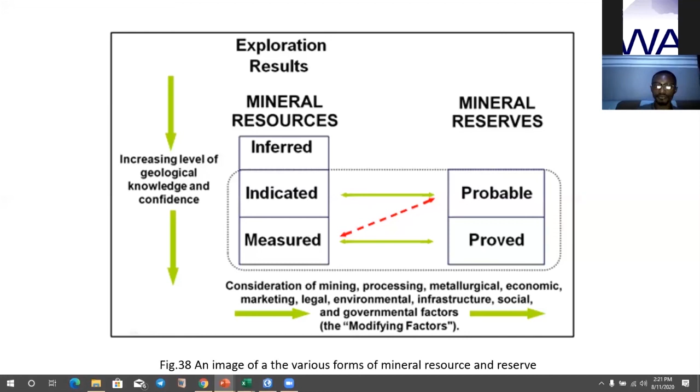And so this can change in various directions with changes in these parameters listed below. And so with the resource I calculated using the Bayesian method, I use the same ArcGIS Pro to find the area. I know the thickness of the area, which is 0.33 meters, the grade and everything, I know it. And so I can now calculate the resource in the area.

I believe I'm trying to prove it. So what I'm trying to do is I'm calculating a proved reserve. So that is what I'm doing. And one thing we have to notice, you have to start calculating your resource or reserve from the first pit that you did. You have to first start calculating it. And so let's hope someone has done that, and I'm coming to do the proving or the probable.

And so this is the method we use in alluvial. It's quite simple. After doing your statistical analysis and coming to this, you can create an area of the mineable areas, high zone areas, and then you neglect the places that are bad. And then you do it. Mining site C, we have an area of 318,600 meters squared with a thickness of 0.33, a grade of 0.25. And so you want to know the reserve and the grade that we are having in this area. So we do the calculation.

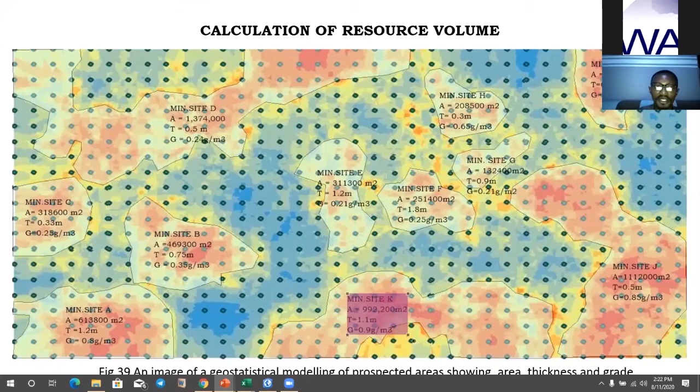And so with this, we know the square meters to be 613,800, and average thickness to be 1.2. We multiply, we get the volume, because the resource is average thickness of gravel times blocked out area. And so with this, we calculate and find the total volume of the mineable areas. We forget about the grade that fell below our cutoff. And so we know the total volume of the area.

And then we want to calculate the average grade of the area. So it's grade times volume plus grade times volume of a different site. Just like that, you calculate grade times volume for the sites. So grade times volume plus, just like that. And then you divide it by the total volume of the area.

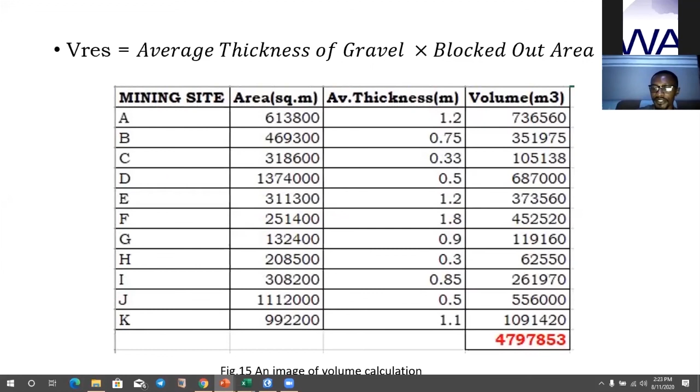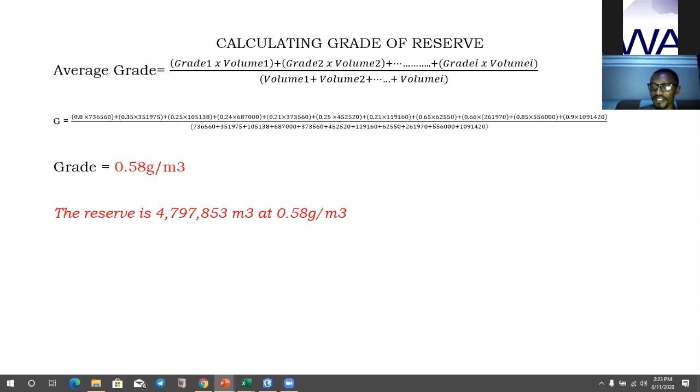And with this, with the geostatistical analysis we did here, we got a volume of 4,797,800 meter cube at an average grade of 0.58 gram per meter cube. And so when we are reporting, we say the reserve is 4,797,853 meter cube at 0.58 gram per meter cube. This is a very huge volume.

And so I will look at challenges that are encountered in alluvial prospecting. You see, most of the time, the budget that you send is not readily available. So they will just give you a small portion of the budget that you requested, and then you use it. And one thing is insufficient negotiation with opinion leaders often makes the work tedious, and the influx of crude knowledge. Everyone knows how to do it. So when you say this shouldn't be done, this is clearly not correct, everyone thinks, well, we've done it for so long, and so we can do it. And it is hindering the correct procedure that should be followed.

And with the activities of galamsey, the redirection of streams and disturbance of virgin forest makes it difficult to follow your points. The point that you say will fall here, you go there and that place is mined out. So you just have to find a different place or change your position.

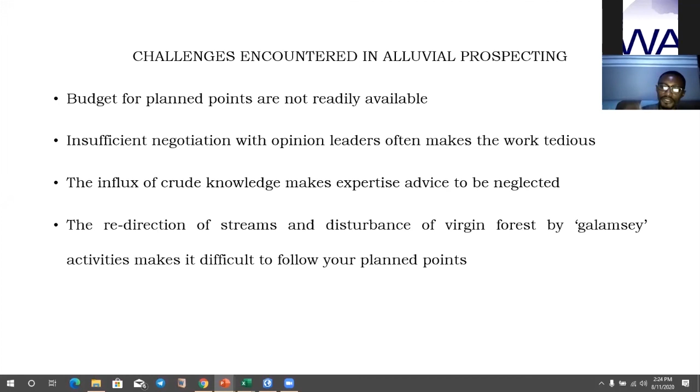And the good news I said I have, there are companies around that might need your service. With this knowledge that you have right now, I think you can survive in any of these companies, which are all alluvial mining companies. We have BSD Mining Limited, which is in Eastern region. All these companies are in Eastern region. BSD, they have no geologists now. We have the Kibi Goldfields. They are working. They have geologists.